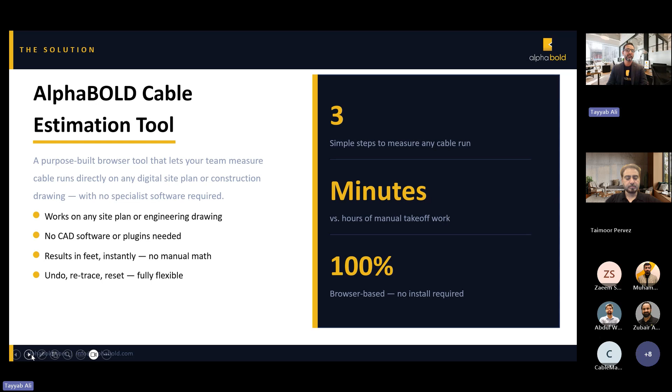How it works is that we have a web-based interface. You log into that. It is user-specific, so each user can have their own login. You create your project, you upload your drawing essentially, and it's configurable where you can select any object you want detected in that drawing.

So we understand that some organizations would be using, for example, a triangle as an outlet. Some could be using a square, a small hexagon, whatever. So you can just use the same software to be able to detect any of those.

And then it identifies that object across the pages that are of relevance. And also it measures the cable path and traces it for you and gives you the cable length in those drawings. The idea being that we want to reduce your 2 to 4 hours to under 5 minutes.

We want it to be very simple because we understand that we don't want technology to be a barrier to entry or to use this software. We want it to be 100% automated, but we also have this provision of what we refer to as human in the loop. Based on that, you can set up certain confidence levels, and if the detection is less than that confidence level, it can send you an email so you could eyeball it. But still, it can significantly reduce the time you're spending on it. In most instances, you won't even need to eyeball anything and it will detect everything accurately, especially as it gets more mature in your specific environment.

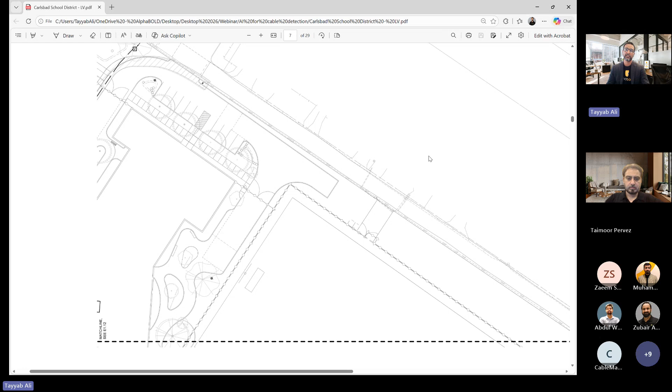Now what I want to do is upload my drawings here. The drawing I'll be using in this case is this particular specific drawing. Again, fictitious data like I was telling you, but you can see in here I have my cable that I want detected. This is going from this MDF, and it kind of gets to the end of the sheet, which means it continues onto the next one. So I want this page and this page to be part of this. And then obviously I have some of the outlets as well.

So you can see here I have these triangles in terms of the outlets that I wanted detected, and you see I also have these numbers which tell me it's a single cable run or multiple cable run, and so on and so forth.

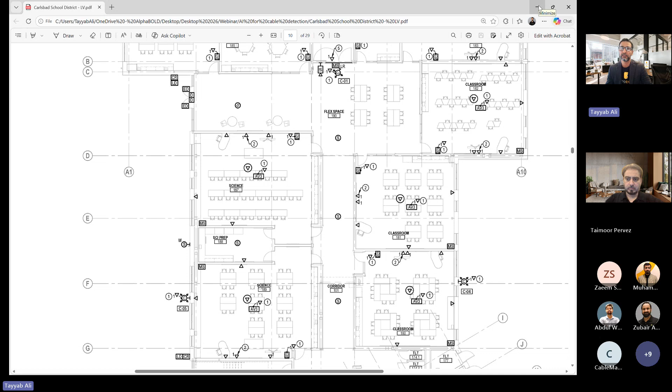So this is the drawing that I will be uploading into that estimation tool, so I could then use for automatic AI-based estimation. I'll go in here and select this for low voltage. What's going to happen is that it uploads that drawing, and then provides me a provision to select the object and also select the pages that are of relevance to me.

Why we did it this way is because when you download these drawings, they could be hundreds of megabytes. So it uploads everything, but you don't want the AI model to go through everything because a lot of those pages are not of any relevance to you. If you're a cabling company, you only want the pages that have a cable, a site plan that has a cable in it, or a drawing that has an outlet in it. If you're an HVAC company, you would probably only need the mechanical drawings.

It takes a minute or so. This one that I uploaded is around 95 MB, but you'll see that it's pretty efficient in terms of uploading that in there. And when you have uploaded it, it also shows you all of those pages in this format.

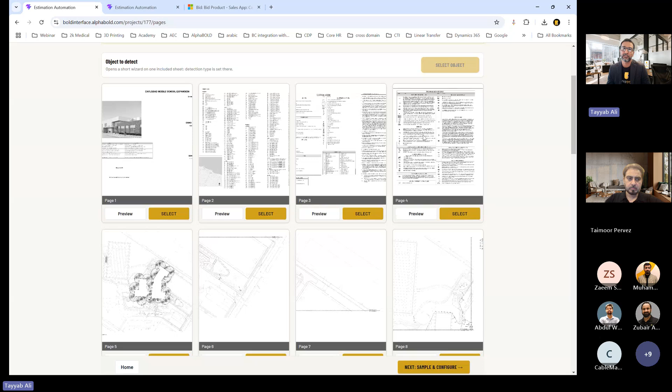So you could then preview these pages and detect what you're looking for. For example, if I hit this preview, you can see this is my technology legend. So I can select which object to detect in these drawings, and I'll show you that in a second. I want to select this page because this is where I'll have the identification of my object, and it's telling me here which object to detect.

So I can select that object, but I'll not do it right now. It's also asking me to use preview to zoom in and include these pages, and select the pages where you want these objects to be detected.

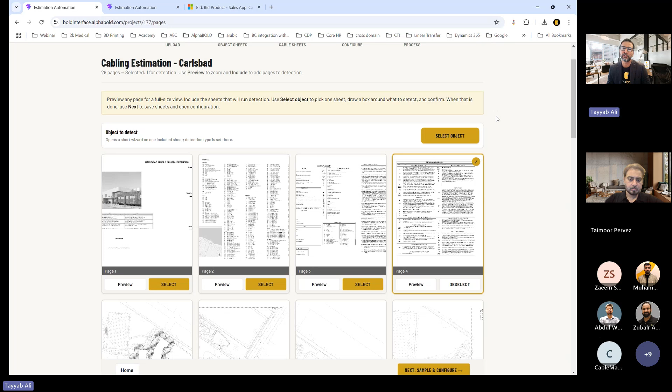So for now, you can see I have this page 10. It has a bunch of those triangles that I was showing you, so these outlets in a way. I want this page to be part of my estimation automation. I'll select, okay, I want this, and I can select all of these, but just to reduce the amount of time it will take, I'm just going to select these two pages for now.

If I go to the next page, it will tell me that I have not selected the object to detect - it says object not selected. Then what I do is go up here and actually detect that, select that object. I wanted to detect this triangle, so I just zoomed in here and said, okay, just detect this guy. And now I say preview crop.

We understand that you might have different objects in your business. If you're a cabling company, they might be similar to this, but based on some of those large organizations producing these drawings, it could be a different symbol as well. That's the reason why we made it configurable, so you can select whichever object of interest. Once you do that, it maps it to the models that are pre-trained. You can see there's already a model in here which is trained on the triangle.

Now let's say if you have drawings that have different symbols, we will be training those as well. That's what I meant when I said it's not a ready-to-go application where you start paying per user per month. What usually happens is that you say you're interested in it, we look at some of the drawings you have, we say okay, what type of objects you have, we train the models, we configure them so that they're all part of your estimation automation, and then we deploy this solution for you. It's a perpetual license, and you can continue to use it forever without paying per user per month.

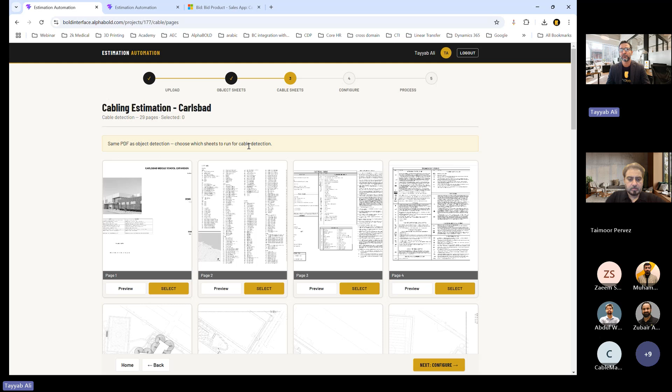Then it's saying, same PDF object, choose which sheets to run for cable detection. Now, because originally, if you remember when I started, I said I want to do two things - object detection and cable detection. So it's asking which pages I want for cable, so I go in here. I obviously want this one because this is an MDF run all the way.

So I select this guy here. And because this shows me that the cable run continues to the second sheet, I want to be able to detect this cable as well in here. So I'm going to select this one as well. These are the two pages I want selected.

And I hit configure. Now you can see it's telling me that I have selected two pages for my triangle object run, and I have these two pages for cable detection. It's asking me for the confidence level. So obviously, if I say 100% confident, then it will detect fewer objects if it's not 100% sure.

But usually it's pretty accurate. So I'll say, detect everything that is around 85% confidence level. And this is where in this tool you can have multiple configurations. If something is less than 85, it could annotate it with red and send an email to you.

So you're just then validating those red annotated objects. You can imagine how much time it still saves you, because you won't have to annotate all of them yourself, maybe only a couple that are very difficult to auto detect. For the most part, I can select any confidence level here. I select 85% and say, okay, review.

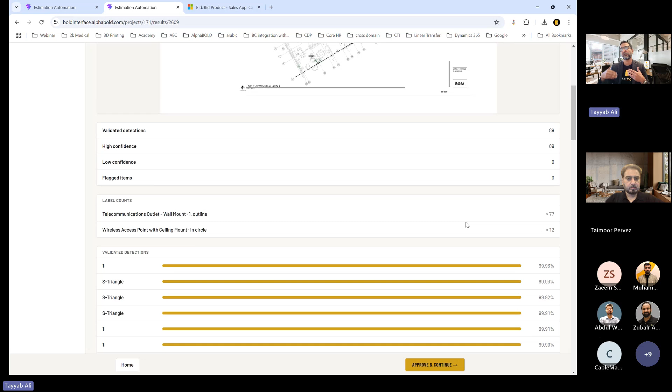It has detected one cable run, wall mounts 77, and ceiling mounts 12. And again, this is something we can train for you as well, so it can detect those things. Based on that, I'll tell you a little bit more about how it generates the takeoff and what else you can do with it.

But in here, it's now telling me about each of these, so S triangle, ones, and all the confidence level. You can see, because we have trained thoroughly on this, it's fairly accurate in here. While I'm showing you this, let me go back here and see. It's almost 40% done, so it should be done in a second.

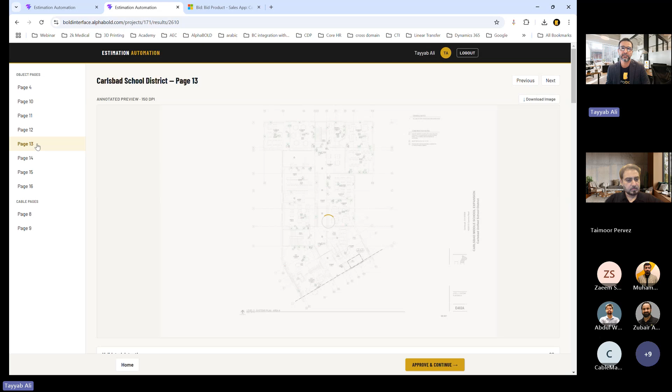Another thing I want to show is the cable run. It has cable pages separated out from the object pages. Same thing goes for all the pages I have in here. All the outlets are detected, but this is pre-processed, and I want to show it to you live. This should be done in a minute or so, now that we're getting close.

Okay, perfect. So it says it's 100% complete now. I'll go and say, okay, show me these results. I can scroll up and now you can see the live data that it detected.

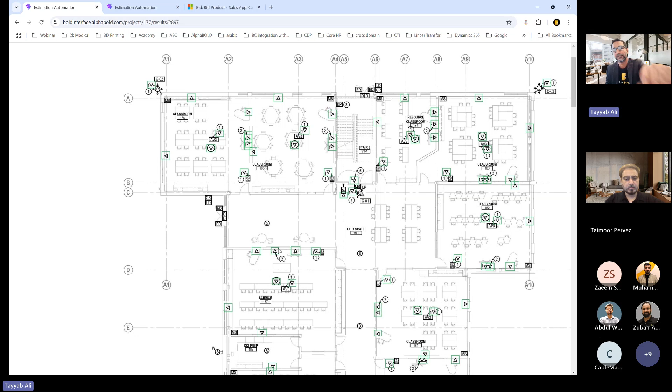So you go through this, and it is annotating all of these triangles. You can see it is fairly accurate. It also detects the cable runs. You see this number next to some of these outlets, so it is able to detect that as well. That's important because that tells you how many cables to put in there.

One other thing I want to show you, same thing here as well. I won't show you the confidence level because we already covered that, but let me show you the cable runs and the feet. You can see it reads the scale itself.

It uses the scale on the right mostly, because that doesn't necessarily change as you zoom in and zoom out. And then from that, the AI determines whichever exposure it is detecting, what is the amount of length of that cable. So this first path that it is detecting, it's saying it's 331 feet.

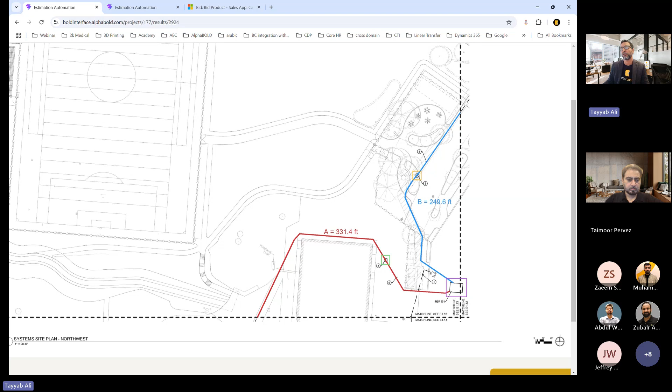Obviously, we haven't so far configured what to add for a vault or an MDF. And the second one, you can see it's 249 feet. If I go to the subsequent page here, you will see I have another cable run, which is 110 feet, and then another one going to this gym that is also 50 feet, and so on and so forth.

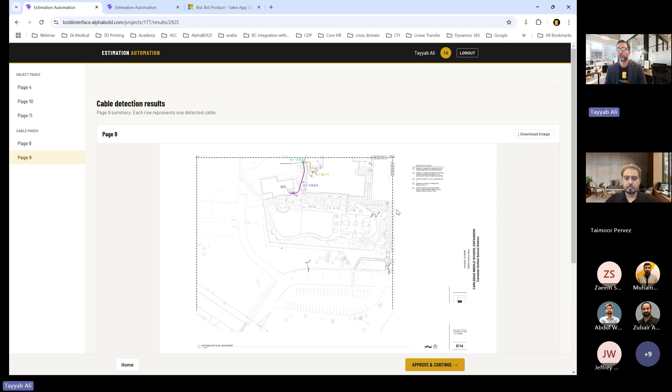So that's kind of how it detects. I can now, as a user, either approve or say I'm not happy with this. I can also download these images, by the way. So for example, if I want to download this image, I click download image and I can download these. But let's assume for a second that I am happy with what I see.

I hit approve and continue. And it says, do you want to create this Excel? I say okay, download this Excel. And I want to show you how it does this takeoff, so I'm going to pull up this Excel here for you.

So this is the Excel that it generated, and you can see on these pages it's telling me on page 10 you have a total of 98 outlets. It's giving me different configuration, and this is where we can do a lot more with this. I'll talk more about that in the capacity of that whole estimation and project management software that we have.

This becomes part of it, where if you have a vendor list, we can send emails to those vendors, get pricing, and calculate labor hours based on this automatically. So you don't have to do anything for the complete bid package. But today's focus is essentially about automating the takeoff aspect of it, so I'm just focusing on that, but there's a lot more that can be done based on this core piece that it has automatically detected.

And it's telling me the pages. So for example, this is page 8, and if I come to page 11, it's telling me what was detected on page 11 as well. So that's kind of a quick demo of this.

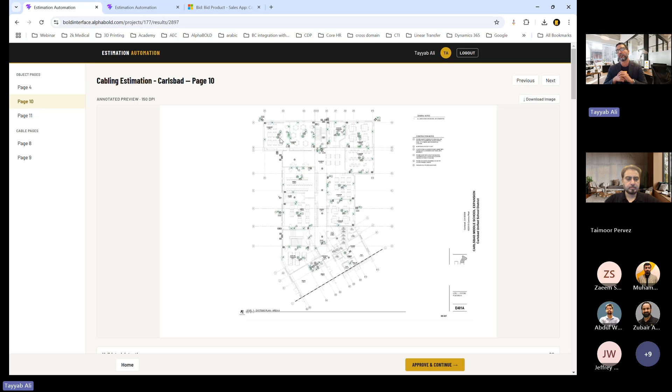You can just use it for your estimation and then stop at that Excel output that it generates for you, and just use that as a tool that you can then use with some of the other tools you have for bidding. Or you just download it and then put in manually your labor hours and other materials that you need, get the vendor pricing, and get your bid ready for that.

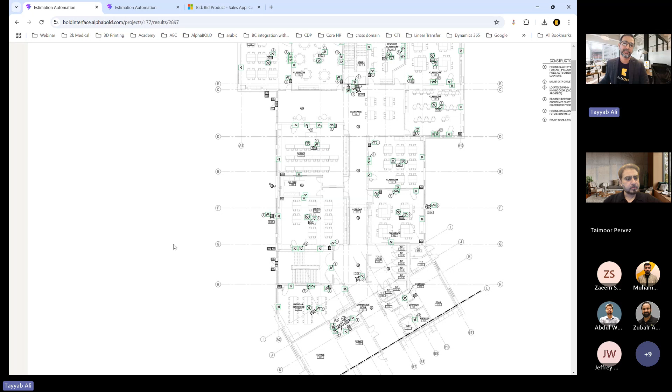We can absolutely do that. So there are a couple of things to consider there. This tool right now, as you probably saw, I'll go back to the home page, can process 150 MB of file. The reason for that is because we wanted to make it browser based.

For example, when I go new, let me start something here. Okay, say create, and I select this. You see it says 150 MB max. Why? Because we don't want it to just slow down because you have a huge package file. If you have a larger file than that, what we will do is probably ask you to upload it somewhere, and then it can just parse it from there, just from the speed perspective.

But coming to the second aspect of your question, one is just a large drawing. The second is that when I upload something, I have to detect which page to go to. So if it's a huge file with say 200 pages, I understand your question that you have to go select one by one. It can do those selections for you as well because it doesn't need to have a lot of accuracy on that.

So what we do at the back end is convert them into images so we could process them faster, and we can highlight those and say these are the ones that are of interest to you. So we can absolutely do that.

But the way we have it right now is more for you to select and give it the pages where you want it to do outlet detection. But the detection process is the same. So essentially your problem, what you're asking for, gets automatically solved because I can do quick detection of even a single object in there. If I could detect one outlet, then that page is a relevant page I should be considering. So we can definitely do that as well.

But for now, what we wanted was that you could see all the pages, as I'll show it to you again. And then once you see those pages, you can just tell the software which ones you are interested in, so it could go faster on those. But if, for example, I detect through all of these pages that page 10, 11, and 12 are of interest, then this process would probably take a little bit longer because it will have to go through each page and detect at least one object and say, okay, this is the relevant page.

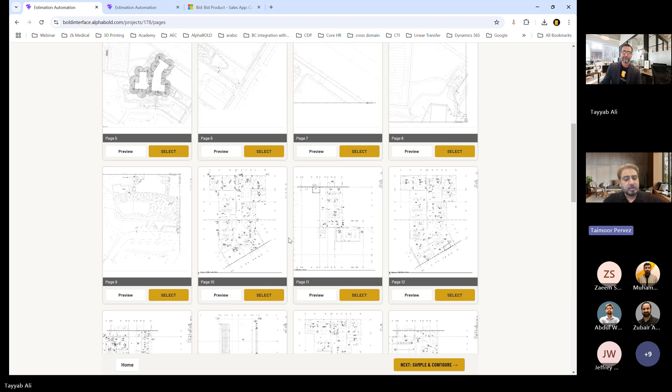Go ahead. So will it do duct banks and takeoff trench, ready mix, conduit, and electrical wire cabling? Yes, that's the reason why I chose this cable piece. So essentially, what you're saying is very similar to detecting, for example, for HVAC companies. I was talking to one of them where they wanted to do duct lengths. And there is another company that wants to do pipe lengths and fittings. So it can detect those inside a drawing.

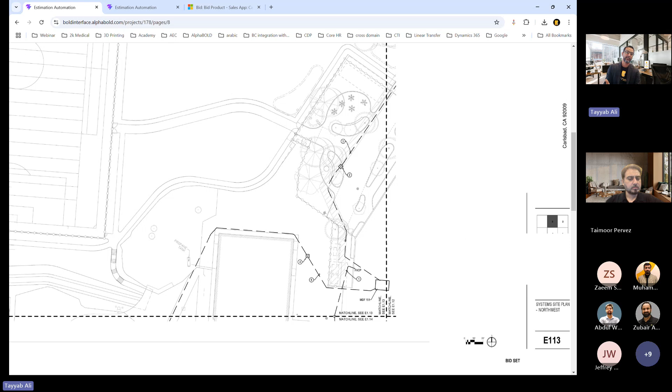As you can see, it can detect this cable. It can detect those as well for you. We just have to train it so that it could function for you. The training process is, as we start onboarding you, we get your samples, we train the model, we plug it in, and then you can start using it and testing it out, and it will start giving you the results that you see in this demonstration.

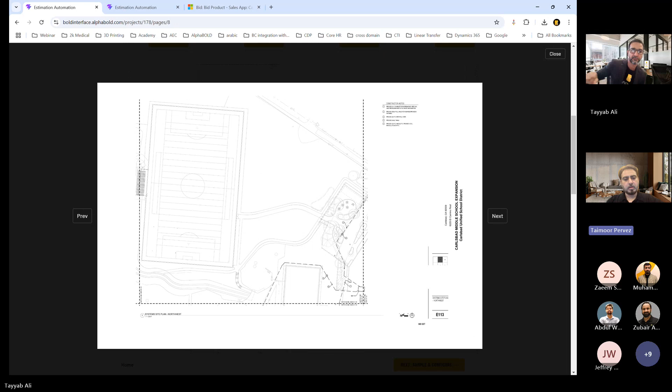Jonathan also asked if the product is basically for low voltage. No, it's not actually. It can work for HVAC companies as well. So that's why I was trying to explain.

That's the reason why we put in the provision that you detect the object. So for example, if I select this, I go into this detection of the object and I say, this is the page where I have this object. Imagine if you are not a low voltage company, so you're not interested in, say, this triangle here. What you're interested in is a hexagon, which is for HVAC companies.

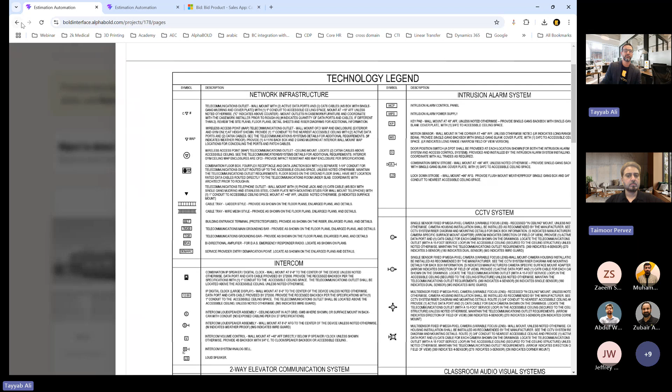Let me just show you an example of that. If I go back to the home page here, this, for example, is an HVAC company, and you can see here I have these HVAC units detected. So this is not at all for just low voltage.

We wanted this demonstration to be very specific to cabling companies and low voltage companies because that was our target audience, and we wanted to make sure we are showing them something that resonates with them. But we can do this on almost any object.

If let's say you have some drawings that have elephants in them, we can have a model trained on those elephants and it will detect all the elephants in those drawings. Just like here, you see it's a hexagon, right? So I'm detecting hexagons. It depends upon which object I select in the legend.

And yes, then I have to have a model that is trained on that object, and then you're ready to go. We are talking to a company that wants to detect openings in a drawing. We're talking to multiple different companies and they all want to detect different things. So it's not at all just for the low voltage company.

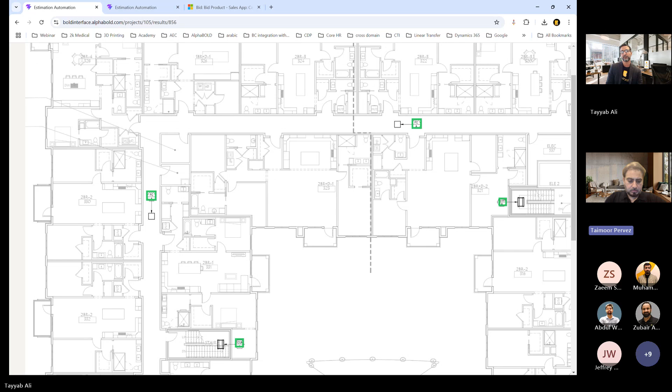Perfect. I had a question as well, Tayyab, if you don't mind, and I'm sorry if this is slowing it down. Just for the benefit of us all, do you mind explaining the benefit of having a perpetual license as opposed to a subscription-based software? I mean, does it mean that we control all our own data and it is customized to every particular business's needs?

100%, but a couple more things there. When you go with the subscription-based license, if you have a new object that you want to detect, if you have something that doesn't work, you don't have any control over working with anybody to be able to configure that. With this, what happens is that you have a perpetual license, but we have a support contract with us.

And if you have a new type of business that you want to launch, or something new that it doesn't detect, you can reach out to us and we'll train the model and you can start using that. So essentially, you have just an onboarding cost of us understanding your object of interest and training the model on that, and then configuring it and deploying it for you.

But then you own it perpetually for as many users as you want. Obviously, you have to pay for the AI model and the tokens that it consumes. And we are also thinking about having local LLMs eventually, so you would probably not have to pay for that. Obviously, you have to pay for electricity consumption for running those models.

But the whole idea is that we don't want to be in that traditional SaaS model where you get stuck in that model and you don't own anything for your organization, and it can never evolve to your evolving needs. So we feel that, especially with the new trends out there, this is a lot more flexible. This gives you a lot more ownership, and you can configure and fine tune it to your business.

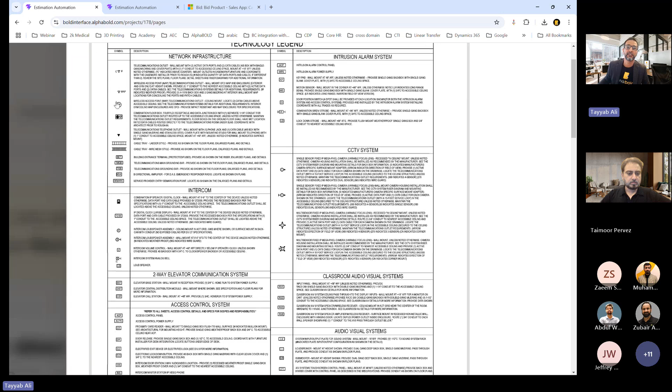So I say, okay, if this is the circle, I don't have a model that detects it, so I will have to train a model that detects it for you. That's the piece where I have to onboard you and spend time with you. Once I'm done with that, the rest of this application is ready for you to use.

So just to give you more color to answer your question, that's why, like Tim mentioned, we'll have to have that one-to-one conversation with you and tell you exactly what the effort is to onboard you onto this.

Perfect, thank you Tayyab. I'll just close with this. Remember, with all the talk around AI, there's this polarized range from fluff and buzz to skepticism. And like Dave said, we like to be in the middle, where we really want to use AI today to deliver tangible value and solve real life problems. That's where AI's true benefit is, beyond the chatbots.

Because we're a consulting company, and because it's a customized solution, we heavily rely on you guys, our customers and potential customers, to have these conversations with us, because we really want to identify your pain points and solve those problems. So the next step - and this video will be shared with you as well - is that we schedule one-to-one calls with our consulting teams, go through your actual processes and workflows, identify problems, solve for those, and give you perpetual solutions that you own.